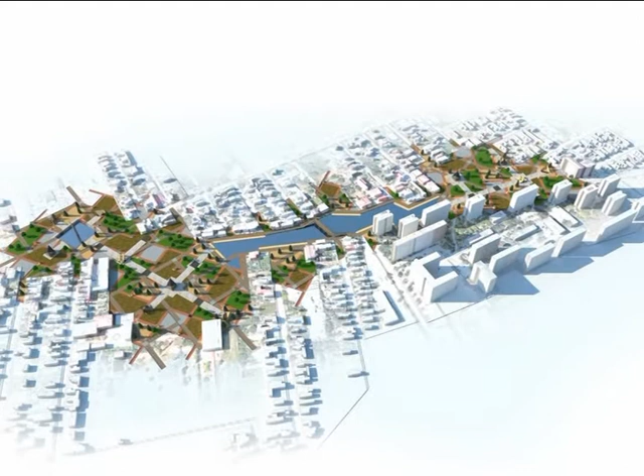Ice Beach Park generates a new urban axis in the south of Bucharest. Sited just on the frontier between Ferentari and Rahova, it works as a connection between these two neighborhoods.

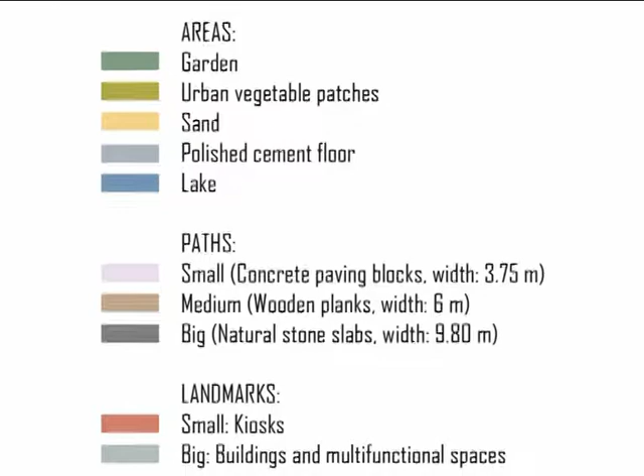By creating this new urban landscape and filling it with a varied program, it gives response to many of the problems and needs of this area of Bucharest, such as the lack of green areas and entertainment facilities, or the almost inexistent retail trade.

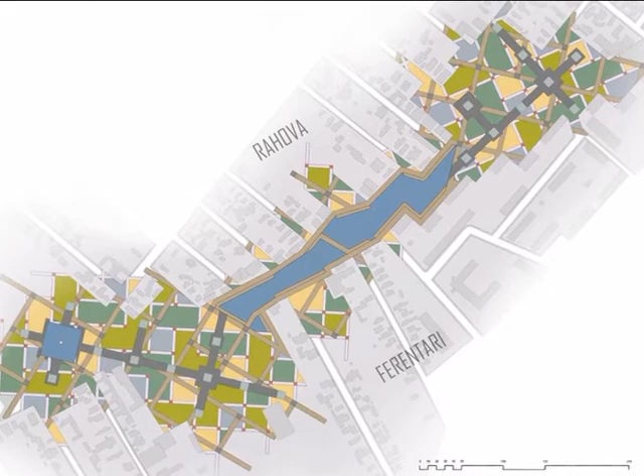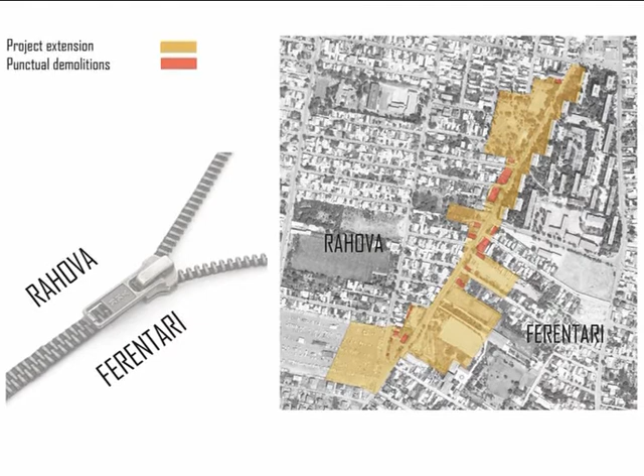The park grows longitudinally along Salai Street and transversally, interconnecting some non-built-up areas that get into the two neighborhoods. Only a few precarious constructions should be demolished in order to get enough space for the park.

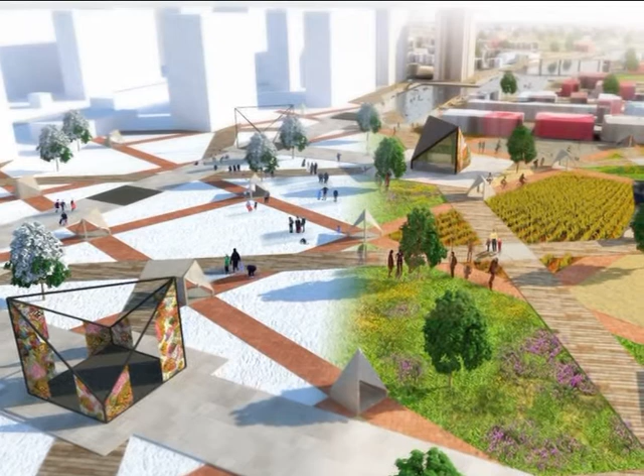Bucharest is the European capital city with the highest rate of thermal amplitude. In summer 40 degrees Celsius can be reached easily, and in winter the city lakes and river get frozen due to the low temperatures, reaching -20 degrees Celsius.

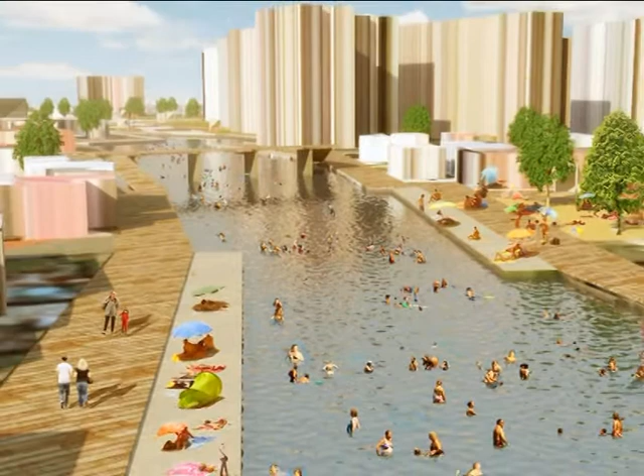The longitudinal lake created along the park becomes an urban beach in summer and an ice strip in winter for the citizens of Bucharest. The target is to create a place where swimming and ice skating is permitted and can be done in safe conditions, in contrast to the other lakes or rivers of Bucharest.

Furthermore, the park has plenty of areas assigned to urban vegetable patches. During each season, the neighbors from Ferentari and Rahova will make use of them, and grow their own vegetables and fruits.

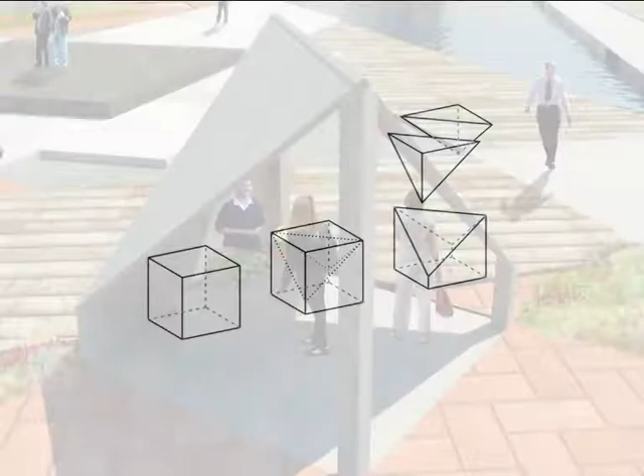The design of the park comes from the scaling and overlapping of a grid of paths, suggesting many different itineraries decided by the observer. In the intersections of each grid some landmarks could be found. The smaller ones are selling kiosks.

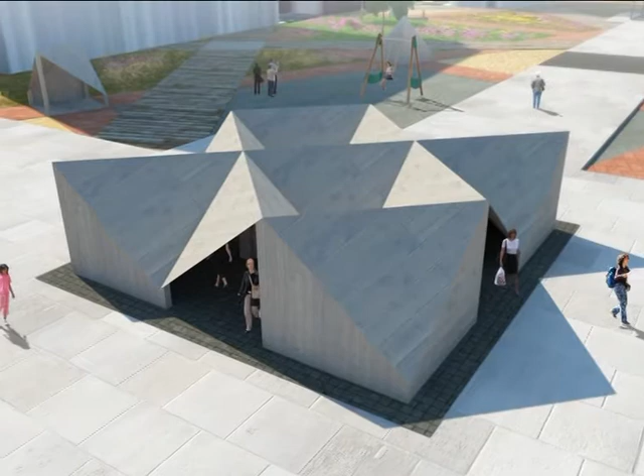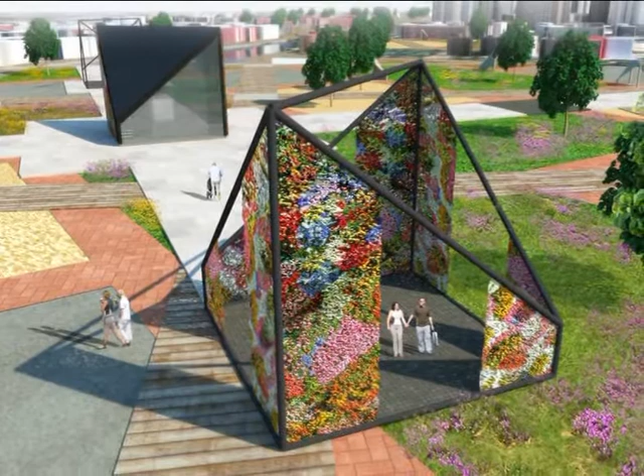The big ones take different shapes according to diverse program requirements. Some of them are little multifunctional buildings. Others are light structures with vertical gardens, parasols, stages and grandstands, or vapor refrigeration systems.

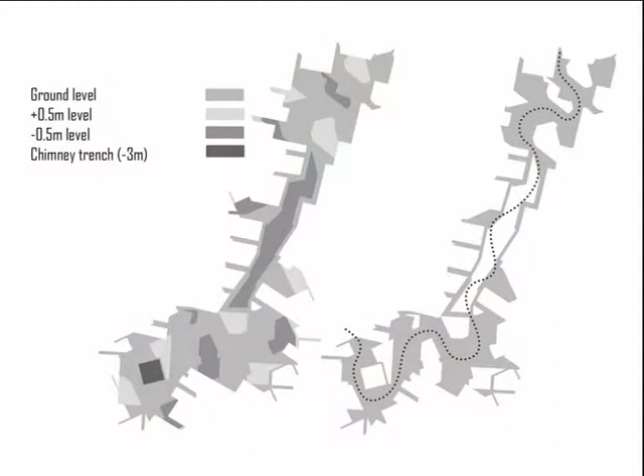The topography of the park is altered when some platforms rise or lower a bit from the ground level. These platforms create some suggested seating places and reveal a sinuous promenade that goes all along the park.

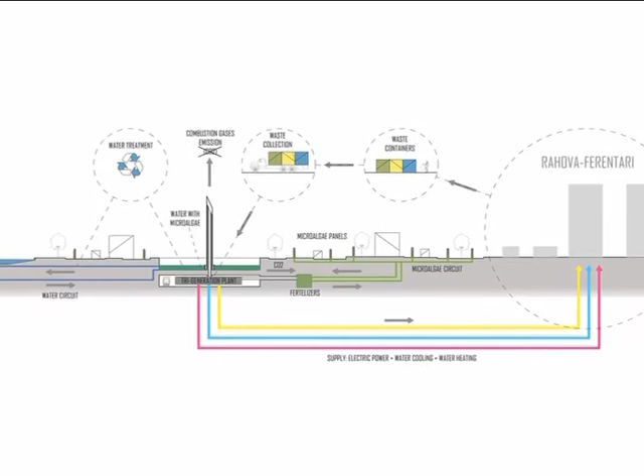The Ice Beach Park also plays its part in making Bucharest become a smart city. One of the main problems of these two neighborhoods is the inefficient garbage collection system. In the underground of the park there is a tri-generation plant, which works for creating power, water heating, and water cooling for all the area from the biomass obtained from the waste.

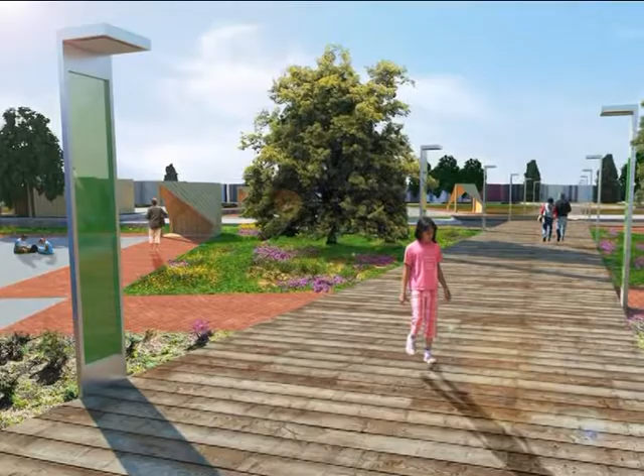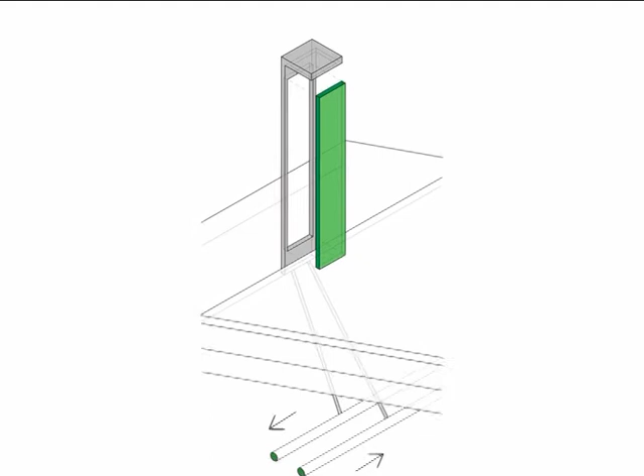The lampposts of the park are equipped with microalgae panels. There is a network of pipes that creates a circuit of microalgae, allowing them to feed with the carbon dioxide produced by the tri-generation plant and be exposed to sunlight for making photosynthesis.

This way the most polluting and dangerous gases produced are not expelled by the chimney. The microalgae also produce fertilizers for all the vegetation of the park.

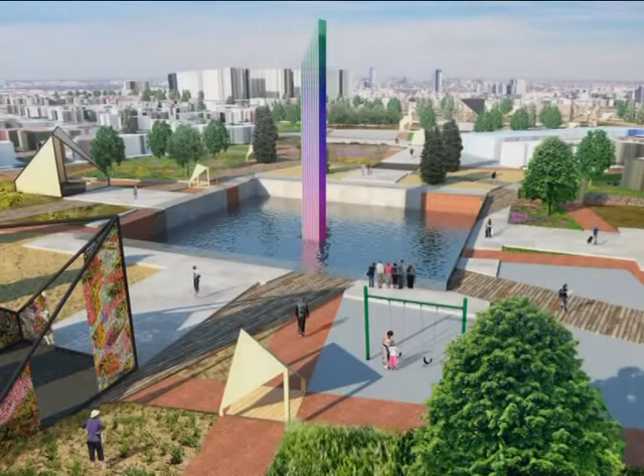The chimney stands as a vertical monolith. The surrounding ground is lowered and filled with water that comes from the lake. At this point the water is treated with a natural process using microalgae before being returned to the lake.

In contrast with the typical industrial and unhealthy conception of chimneys, this one pretends to become a live indicator of Bucharest's air quality. By changing its color it would reflect the pollution levels at any point of the day.

This color-changing facade system is inspired by the way some animals such as chameleons change their color. This happens thanks to some small colored cells called chromatophores that, when receiving a stimulus, expand in order to generate a particular skin color.

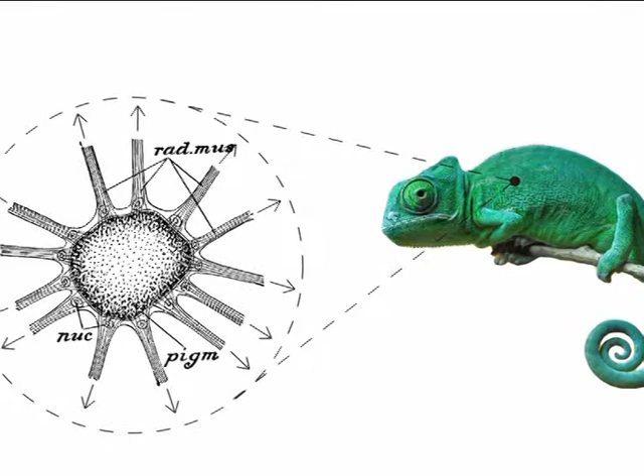This bionic facade is composed of lots of triangular metallic units which contain three pieces of elastic fabric: cyan, magenta, and yellow.

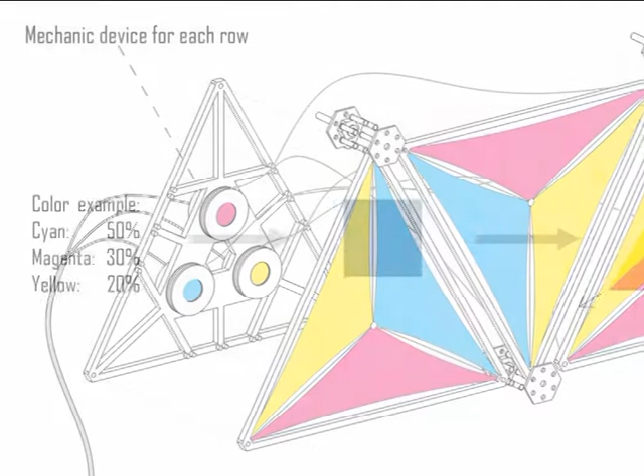A mechanic device tenses some cables that stretch the fabric pieces in order to create the exact proportion of the primary colors for creating a specific tonality. With this system the aspect of the chimney can change at any point, creating gradient colors along the facade.